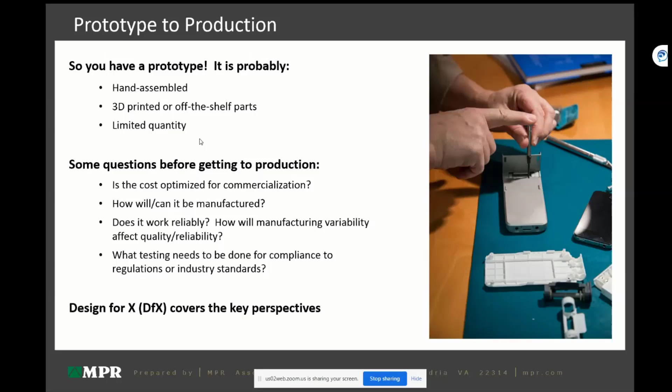And typically in the industry, people will use the terminology DFX, or design for X, design for all of those different perspectives. Let's talk about some of those. At the end of the day, really, what we call DFX is just good design in the first place, because most of these issues are things you consider early in the design process. It's around understanding those requirements, like we talked about a minute ago. Do we really understand the market needs, and have we designed a product to meet those needs?

It's about thinking about design from the standpoint of simplicity, about combining parts or functions where possible. Fewer parts means lower cost, generally speaking. So that's an important design philosophy. Trading off complexity of a part versus complexity of assembly. There's components that you could design that might combine a couple of things so that you just have one part to make. That might make assembly easier, but you have a more complex part. That's going to cost more. So you've got to think through that.

Think through how you're going to manufacture all of the pieces and parts and assemble them. Thinking through the optimal manufacturing processes, and then designing with that in mind. And then thinking through how you're going to control the quality of all those parts in the finished product, and how to make sure that you produce something that's going to be suitably reliable.

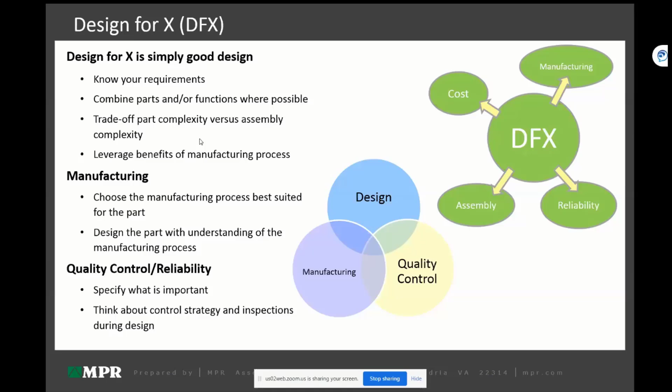So in the case of the device that you guys have prototyped, you have a trigger that causes that device to make a sound. Well, how reliable is that trigger? Is there a threshold that you've designed, above which it'll trigger, below which it won't? What things might contribute to variability in that trigger level that's going to cause that device to work sometimes and maybe not work other times? You've got to think about how all the various design elements contribute to that reliability.

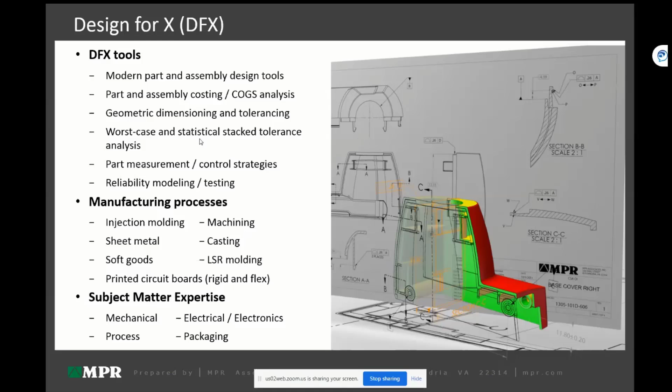So I'll talk briefly about cost. Usually when we're building a prototype, we may have a cost budget for the parts that we use, but we're not really thinking about making that device at a cost that is necessary for a business to be commercially viable. And it's typically the case that prototypes may cost thousands of dollars to make just one, but a product's got to cost less than, let's say, $50 in order to be commercially viable in the marketplace.

So there's actually a significant amount of effort in the commercial world that goes into thinking about how to optimize the cost for a device. And there's strategies to do this. There's what I call the Walmart strategy, which is you find your suppliers and you beat them up to get the lowest prices you possibly can. You buy at enormous volumes to get volume discounts and so forth. And that's a strategy that people use commercially in product development as well. And you can get a little bit from that, but

you can actually get more benefit by revisiting what I call the system architecture, the decisions that were made in architecting the design of the system. And there's things you can do there in terms of looking at part count and looking at ways to combine functionality into a smaller number of parts, really understanding the design margin, whether that's in the design of a battery, if you have a battery-powered device.

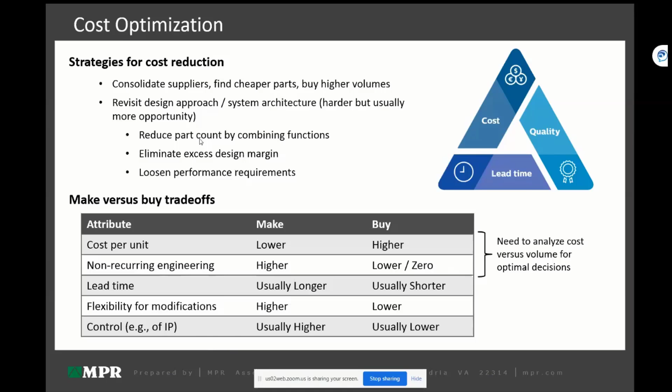An interesting one for lower volume production of polymer parts that often people are not necessarily aware of is urethane casting, which is interesting. You take a 3D printed part, you pour a 2-part liquid urethane polymer over that part, you split that in half, and now you've got a urethane cast, basically, that you can use to then fill with a casting polymer type of solution to manufacture plastic parts.

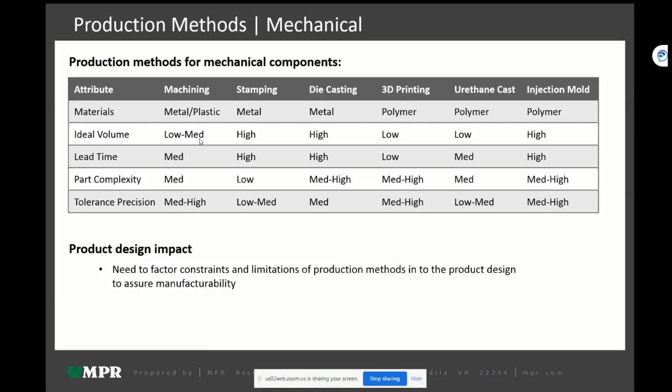A couple of considerations that play into mechanical components as you design the details for manufacturing. I've taken two fairly simple examples out of many dozens of issues that one typically needs to consider, but how things fit together, fits and tolerances, is one example of an issue that seems pretty simple, but it actually gets really complicated, particularly as assemblies get more complicated. But the issue is this: everything in a product gets put together, and we've got to think about different parts and the tolerances on the mechanical dimensions of these parts.

Now, if you think about something like the enclosure for the devices that you've been working on, it probably has a couple of pieces that have to fit together. Maybe that enclosure comes together top and bottom or front and back, and we've got to think about the tolerances of how those two halves fit.

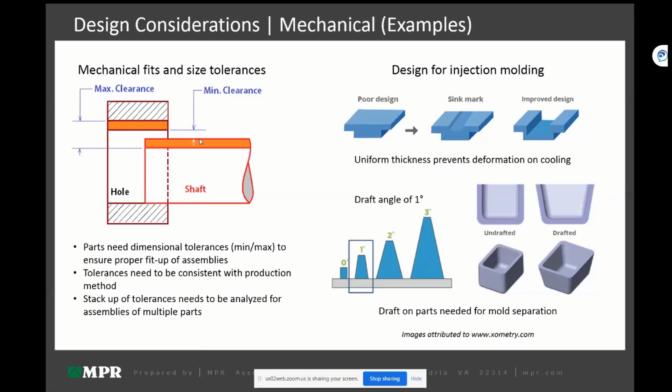The two halves of the mold can't pull apart if there's not what's called draft, which is specified as an angle. So if you see that little chart, 1 degree of draft is typical to enable the two halves of the mold to come apart. At 0 degrees draft, the halves of the mold won't be able to separate, and that'll be a problem. Just some of, as I said, many dozens of considerations for manufacturing for mechanical parts.

There are standards around materials used in electronics. That's what RoHS stands for, Restriction of Hazardous Substances. It relates to restrictions for use of lead, for example. Components can be derated if you look at the detailed data sheets. Resistors, capacitors, microprocessors, etc. are often derated as a function of voltage, current, temperature, etc. So the component selection is really important. The design of the circuit board itself is really important.

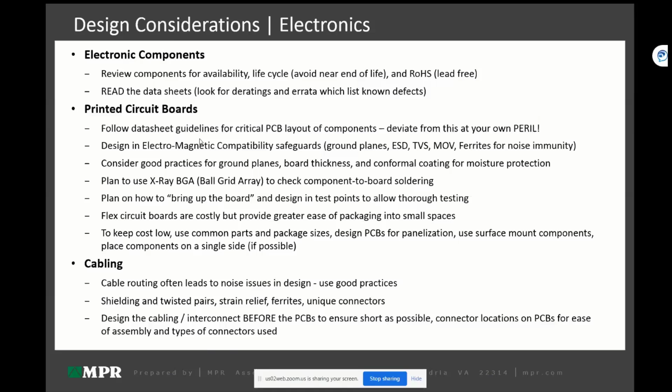Okay, just briefly, it's often the case that reliability problems crop up at production scale that you don't experience at prototype scale. So it's important to think about where sources of reliability issues can come from, whether it's the design, the parts that you pick, or how the device is manufactured. You try to anticipate that as much as you can. And as you start production, test to uncover those problems that you don't see at prototype scale.

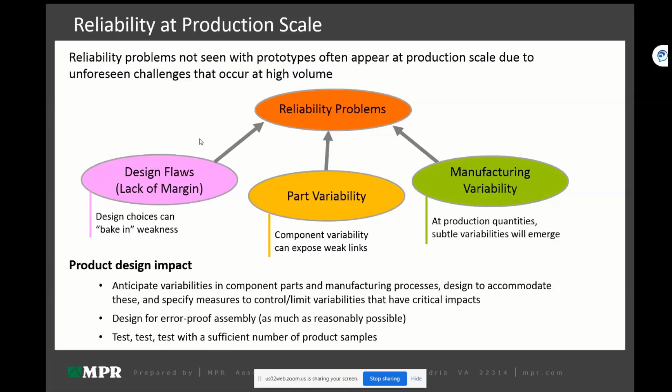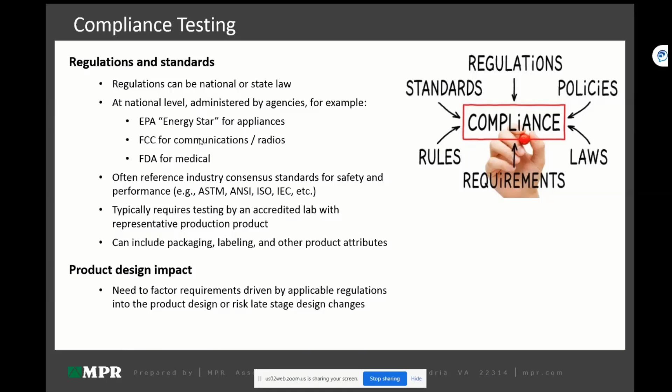I just won't get into details here, but just briefly to mention that there are compliance requirements that have to be addressed as well that can affect how devices are designed. You want to make sure you're aware of requirements that are going to apply and design for compliance with those. Typically, you're going to take product that comes out of the pilot scale of production, and you're going to run that pilot product through the testing and reviews that are required to comply with applicable laws and standards.

And then people often discount the challenges even when you've done all the stuff that I just talked about. Just getting a product actually into production is a huge effort. There's a lot of work that has to be done to engage a contract manufacturer. Let's assume you're not building your own factory and you're going to have somebody else build the product for you. You have to create typically what's called a procurement specification that defines what you want that contract manufacturer to do for you.

You're going to be married to that organization for a long time, so you want to be smart about who you select. So you want to identify a couple, like buying a car. You don't buy the first one you see. Test drive a couple first. Get quotes from them, and select. And people select contract manufacturers based on different criteria that may have different relative importance. Cost is certainly important, but location. You might want to have a manufacturing partner that you can drive to, that's not on the other side of the world.

And there's other services that contract manufacturers can provide as well that's important to think about, like order fulfillment, servicing, field repairs, those kinds of things. Keep in mind that different manufacturers may have different constraints on their capabilities, and so it can often be the case that you think you're done with the design of your product, but you may need to make some tweaks to fit within the capabilities that a manufacturer can provide to you.

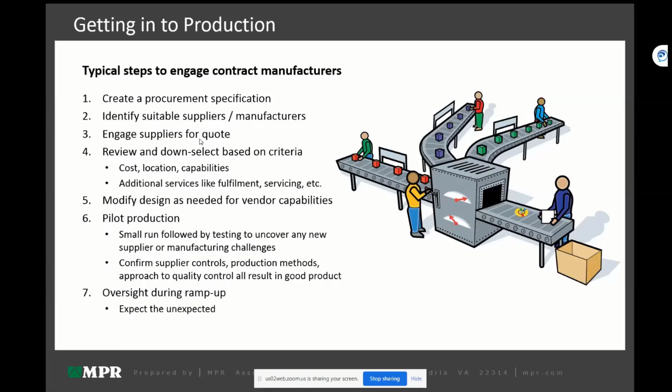So what's interesting in a lot of the work that we do in the medical field, many of those systems tend to be lower quantity. They're not consumer products. Their customers are hospitals. They're making hundreds or thousands of X-ray machines per year, and so that's a different kind of thing than a consumer device like a smartphone, where they're making hundreds of thousands or millions a year.